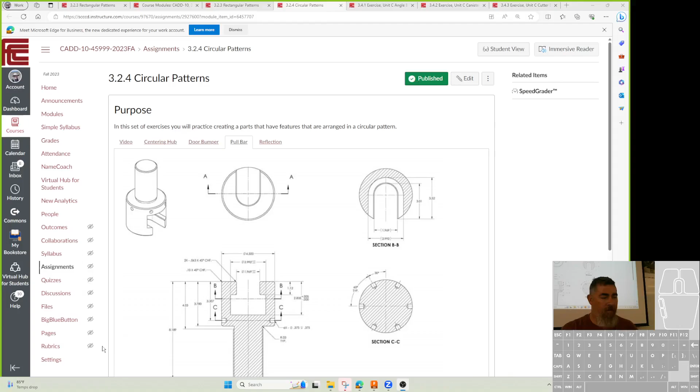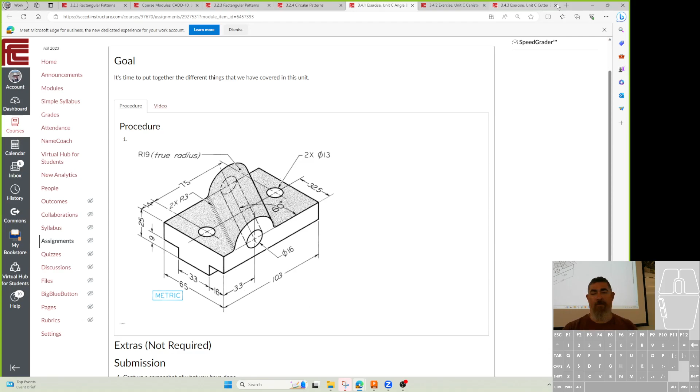And then moving on past, after you do this one, we're gonna go into the summary of the unit ones, including everything we've done. So the first one is this piece here. And you can see that if you forget this little top piece here, it's pretty easy, right? What command do you think we could use for that? Sweep or loft. Sweep.

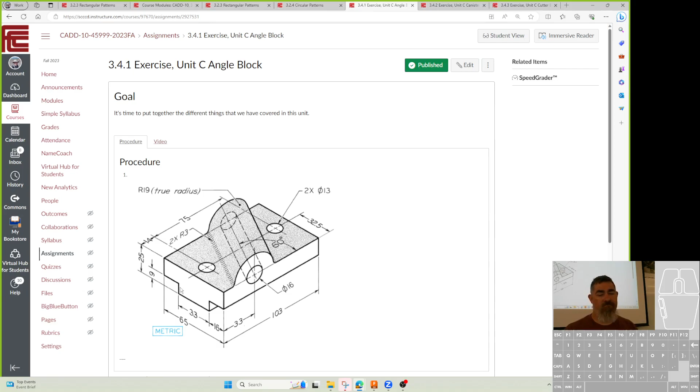Oh, you mean for this piece? I mean, forgetting this piece, what would we do to make this? Without this top piece right here. Just draw squares. Just rectangle and extrude. Yeah, so, rectangle and mirror. Yeah, so we're gonna come up with some general steps here. Make a rectangle and then cut it and mirror it.

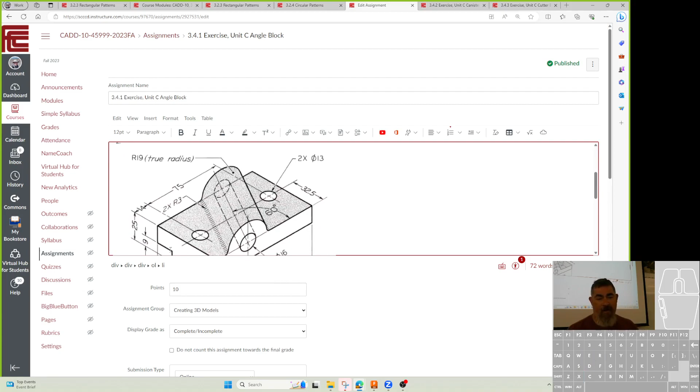Extrude it down through. So now it gives us a rectangle, and what size would you make the rectangle? I can't see all the dimensions right here. Oh. 65 by 25. Yeah, maybe that's 25 by 65, by 103. And then what?

And you make, on the bottom plane, a 16 by 103 millimeter rectangle, extruded 9 millimeters. So yeah, so then we're cutting this slot. So a couple ways we can cut that slot, right? If I go to that,

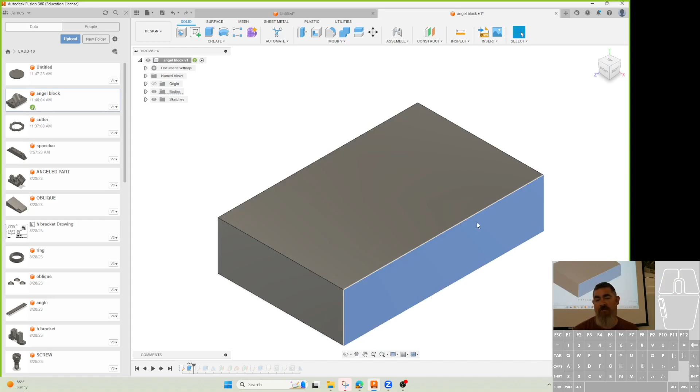and back in time, I could sketch here and draw a line all the way across and extrude back 16, right? I could go to the bottom, draw a line all the way across and extrude up the 9, or I can go here and draw this one, extrude all the way through the part. That's what I would do. Which one's better? That last one. Whichever. So they're all the same.

They all work. But my personal preference, I like to draw it where I can see the shape. If it's just a line going all the way across the part, I can't see what it's doing to the part, so I'm not going to do that. I'm going to do it here where I can see what it's doing to the part. So I'm going to sketch the 9 by 16 and extrude it all the way through.

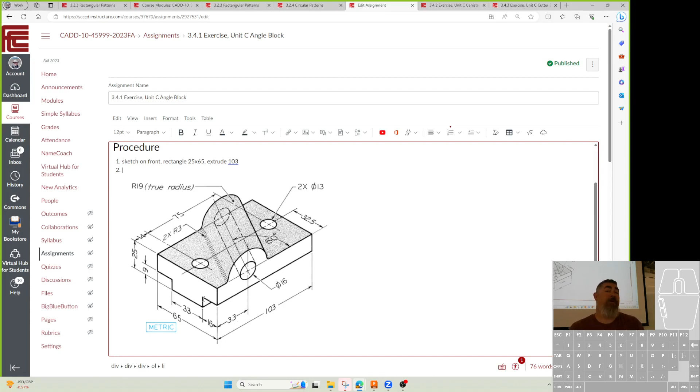If you want to do it from the side and go in, that's fine too. This is one of those things that's personal preference. What works for you? For me, drawing this rectangle from the corner to there works better. So that's what I like to do. And I'm going to leave it up to you. Sketch. Cool. Cut.

You mean plural sketch rectangles? Is this one? But if I have one, what can I do to get the other one? Mirror. You want to have a center rectangle when you have access to that middle plane. Well, I would have made my first rectangle centered. Center rectangle. There.

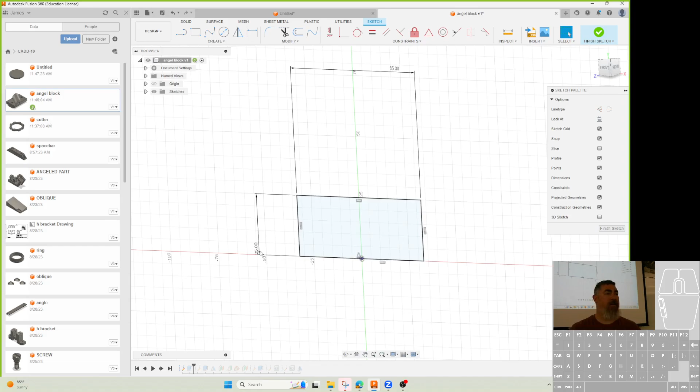And actually, I didn't even do a center rectangle. I did just a regular rectangle, because the whole thing's not centered side to side and front to back. So I just did it there. And then I extruded symmetric, so I put half forward, half back. That way my origin is still right in the middle of the part.

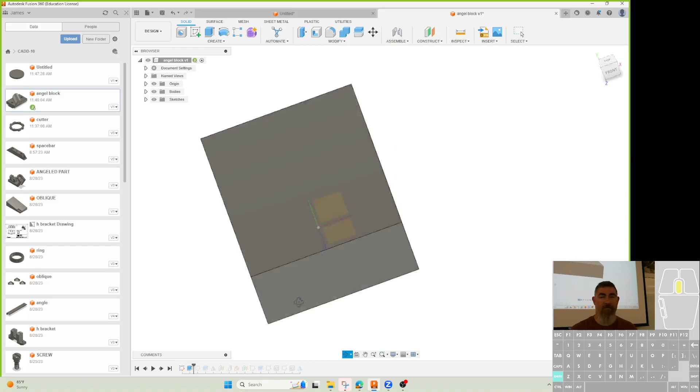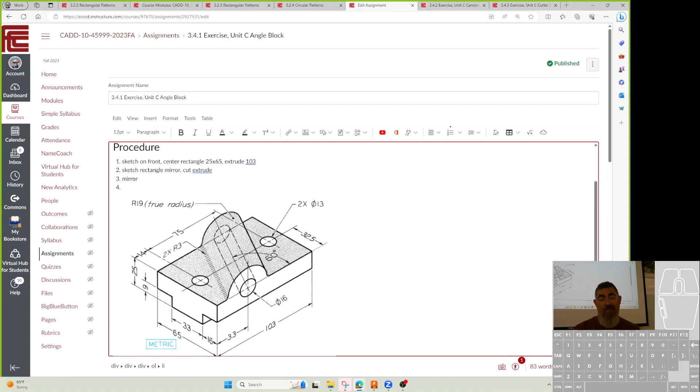So we get that. Now what? So we've got the T done. So mirror. You can do the 13 millimeter holes. Do one hole or both holes? One hole. Two. Both are identical holes. So you sketch a line. Make one and mirror it.

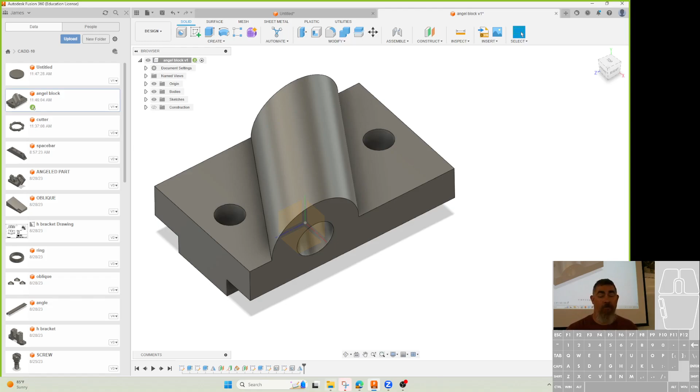Yep. So you could find the midpoint of the plane, draw a line, midpoint, put in both holes, or put in one and mirror it. It doesn't matter. I'm just gonna put in R13 holes. I put in one hole, mirrored it, and I actually waited to the end. Doesn't matter when you do it. It could have been just as easy to do it back here. I can just create a sketch here, draw a line, then midpoint that line to the origin.

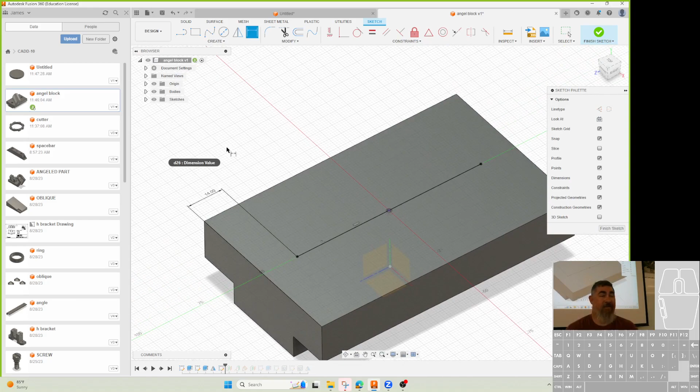Now this is going to stay symmetric anyways. It's always going to be there, and put in holes here. This is okay also, because it's still going to behave correctly. If I make the part longer, it's still going to stay 14 millimeters from the ends. Right? So either way works. There are, like I said, some things I'm not picky about. So as long as that's still following my general guidelines, right? We're still using geometry to center it. It's good.

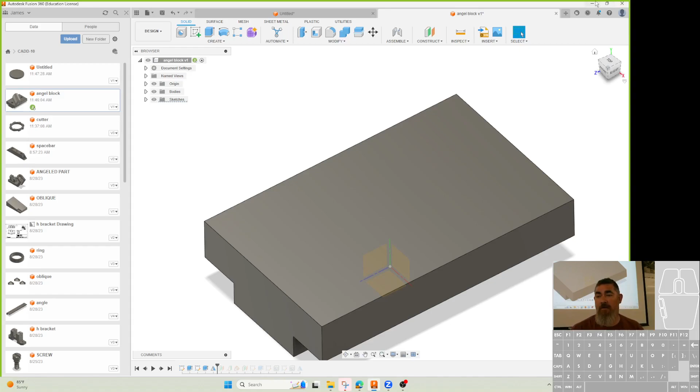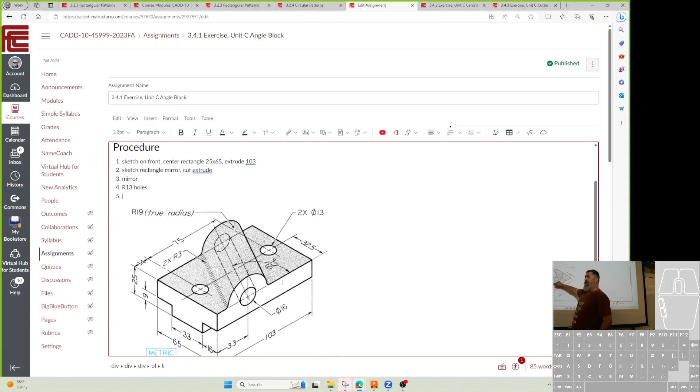R13 holes. Now we get to this piece here. So true radius means that it's an actual full radius. If I'm looking at it on this plane, am I seeing the true radius of it? No. No, because it's going this way and I'm cutting through it at an angle. So this radius right here isn't the true 19. It's, let's see, what is it?

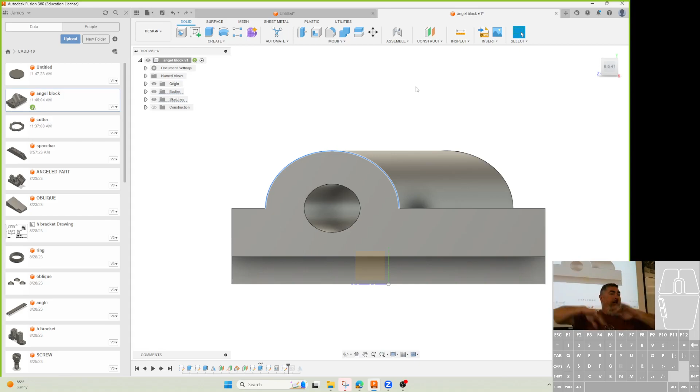It doesn't even give me a radius because it's actually not a circle. It's not an arc. It's an ellipse, right? If you take a cylinder and you cut it at an angle, you get an ellipse, right? So that's an ellipse there. The true radius, though, of this thing is 19. Looking at it perpendicular to the axis, that's where we see the true radius.

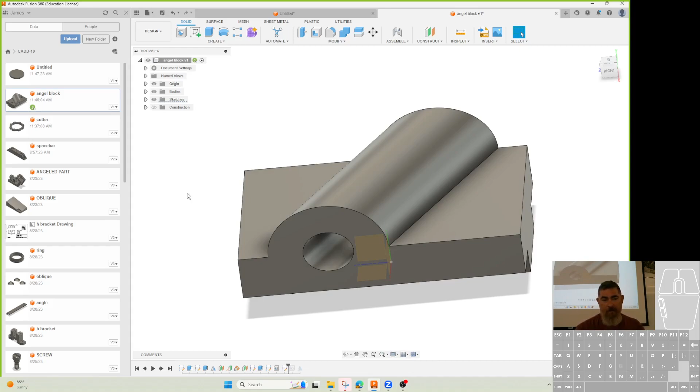And so, how can I make that? An angled plane? Yeah. So I can create an angled plane like that, and actually start it out a little bit further from it. So I can make a plane here and do that sketch. And yeah, project the line.

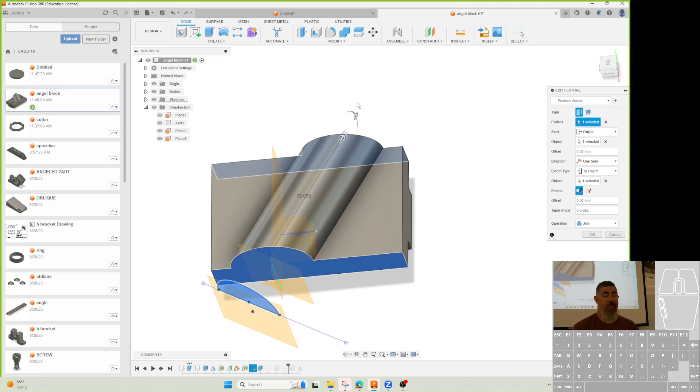And so I started by making a plane over, and then creating an axis here so I can get it over that 33. And then I made a plane at the correct angle, and then I offset it out past the part, so that way I could sketch. And when I did the extrude, I drew it out here, but I had it start at the object and go to the object. If you start it here, it can't come back backwards, because it's kind of cutting through. So I have to start outside of the part. I could have also started in the middle and gone from here to here. It just can't cross the edge.

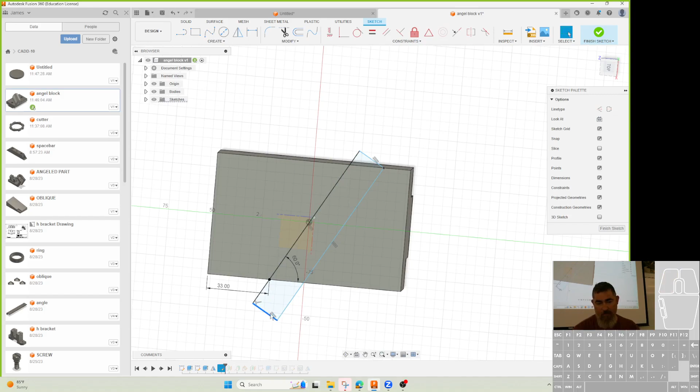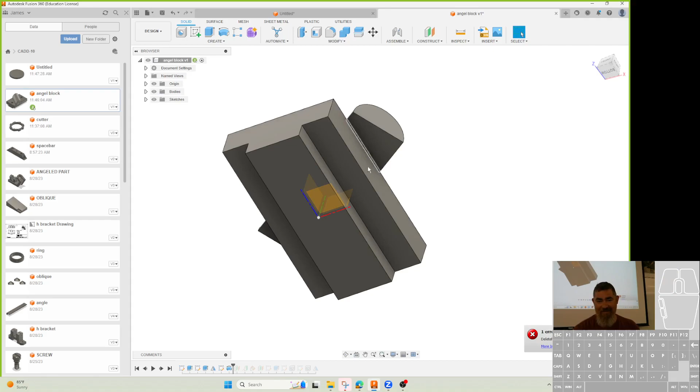That's so much extra work. It is. And it doesn't even want to go. Oh, it did not join. It did join. Why is it not letting me delete? So I could do all that extra work.

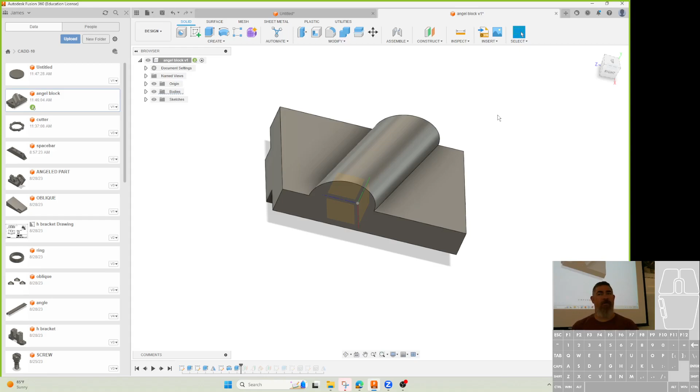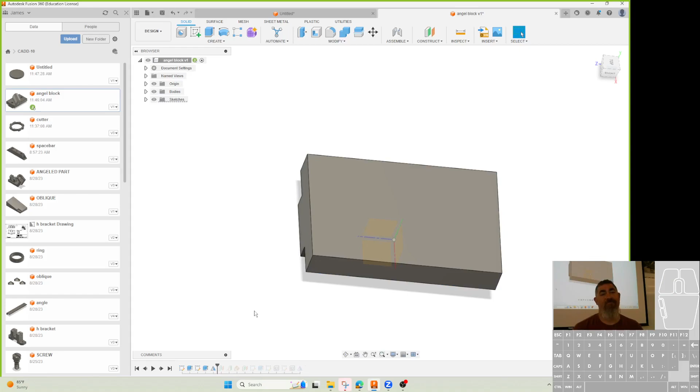So, two different ways. I can draw it, revolve it, and clean it up, or I can make planes and do it that way. Which way is cleaner? Making planes is a little bit cleaner. Do they both end up with the same thing? Are they both adaptable? They still move correctly? Yeah. So either way kind of works. Just construction planes makes it a little bit nicer. I feel like the planes method is also much easier to adjust the size of it. Yeah. So that's what I would do.

And it also already gives us a plane out here, because I need to create a sketch for the point on it, and just project the circle. That way I can stick the hole in, right? So if I did the revolve, I'd have to put the hole in first before I did the cuts.

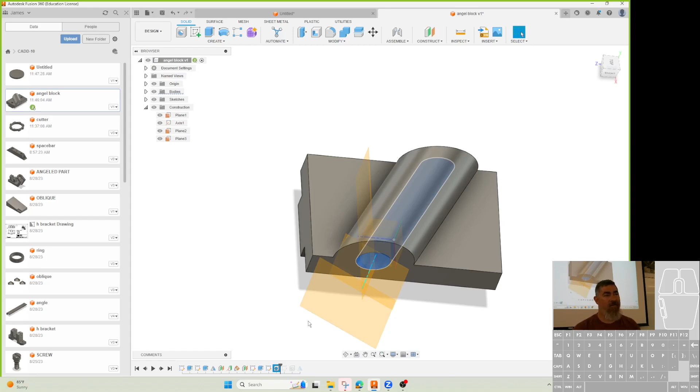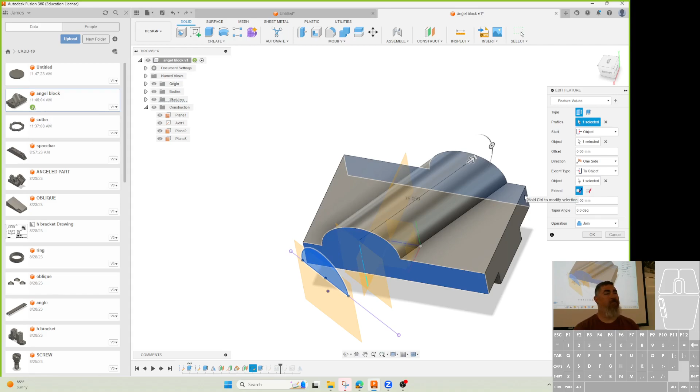For this circle. No, sorry, this. So the sketch was just that, but can I see the extrude? Yep. And so the extrude was just pick the sketch. Then the start was at the object, and I picked this side. And the termination was the object, and I picked that side. So that makes it go all the way through. Okay?